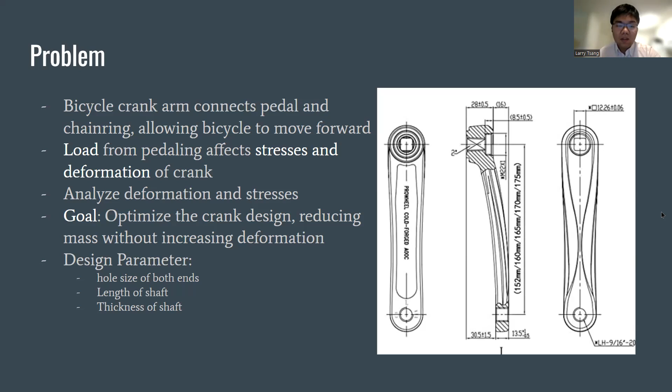And we're going to optimize the crank design, focusing on reducing the mass without increasing the deformation. And below are some design parameters that can affect the mass. For example, the hole size of both ends, the length of the crank, and the thickness of the crank. Next page.

So we start with the geometry of the crank arm. And for ANSYS, of course, we're using the static structural for doing this. And here are some basic dimensions of the crank, just like the figures we see in the previous page. The length of the crank is about 210 millimeters. The body thickness is 44 millimeters.

For the circular hole, the diameter is 15 millimeters. And finally, for the square hole, the side length for each is 12.25 millimeters. Next page.

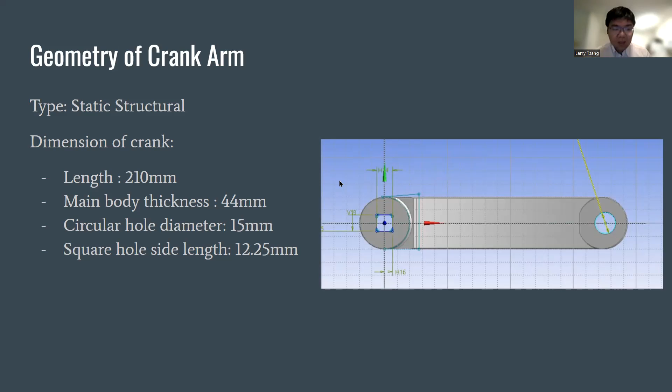Yes. After that, we extrude and make our FEA model of the crank arm. And here's the isometric view. And we chamfer most of the edges of the crank arm. And we have to mention that the material we are using is aluminum alloy, for which the density is 2,770 kilo per cubic meter, and the Young's modulus is 71 GPa.

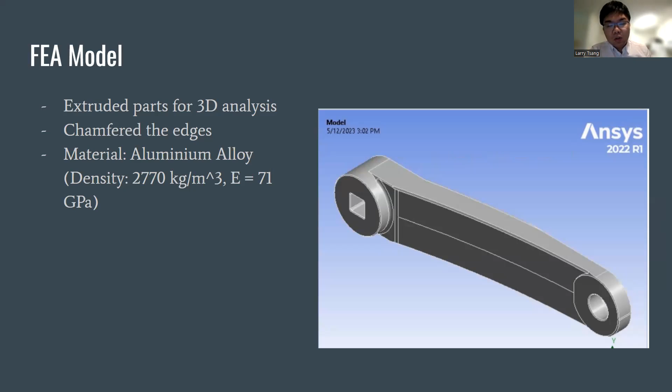Okay, so for our mesh, we used a mesh element size of 1 millimeter for the entire geometry. The smaller mesh elements were created at areas where higher stress was calculated, and to improve the mesh, we added chamfers to smooth out the edges and reduce the stress in the region.

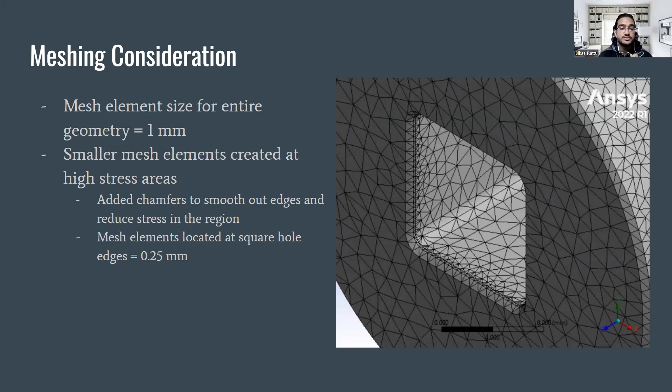And for this geometry, the smaller mesh was needed in the square hole as we found the inner edges to have the highest amount of stress, and the mesh element size used here was 0.25 millimeters. Next slide.

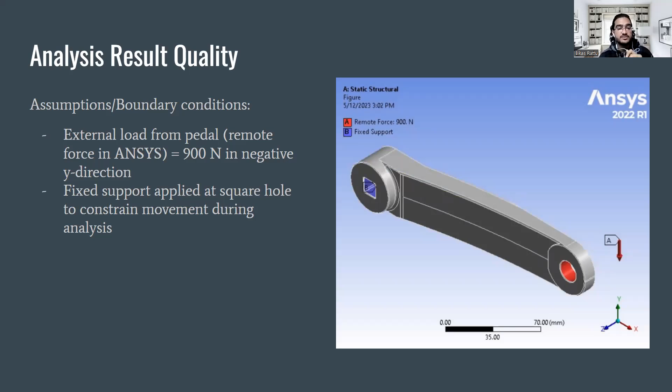For our analysis result quality, we made assumptions and created boundary conditions to help generate a realistic analysis. We applied a 900 Newton external load or a remote force in ANSYS in the negative y direction, which can be assumed from a bicycle pedal. We also applied a fixed support at the square hole to constrain movement for analysis. Next slide.

For deformation analysis, we obtained a maximum deformation of about 0.4 millimeters and an average of about 0.1 millimeters. In this case, the deformation is expected to occur when the applied external load set 4 centimeters away from the geometry results in a rotational motion due to the bicycle pedal. So we can expect a slight deformation at that end of the geometry. Next slide.

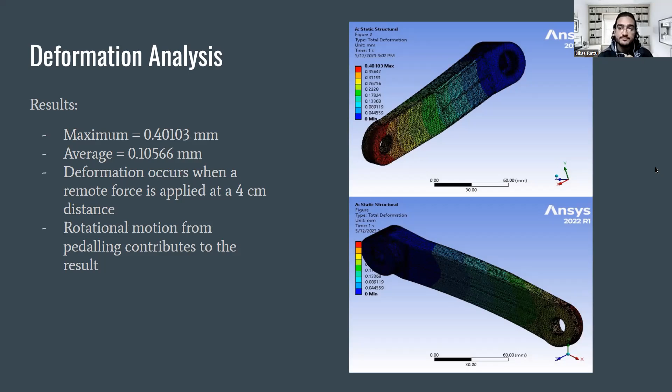For the von Mises equivalent stress, we analyzed this by solving for averaged and unaveraged cases, and it was found that the averaged maximum stress is about 357 megapascals, and minimum is about 0.18 megapascals. The unaveraged maximum was 448 megapascals, and minimum was 0.12 megapascals. And these different results proved that the analysis did not converge.

Although this is a challenge, it should not have a significant impact on the effectiveness of our analysis because theoretically the results do not converge at sharp edge geometries, regardless of how the mesh sizing is done or the smoothness of the edge. But instead, the results increase the stress magnitude to an infinite amount.

And to tackle this issue, we used chamfers to smooth out the edges of the square hole, which is the location of the max stress. And this was the best solution to reduce the stress and obtain the best results. Next slide.

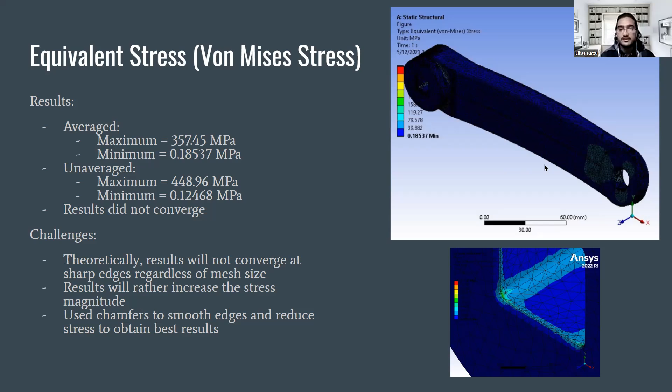And once again, the results didn't converge for the same reason mentioned in the previous slide, and the same solution was effective in solving this as well. Next slide.

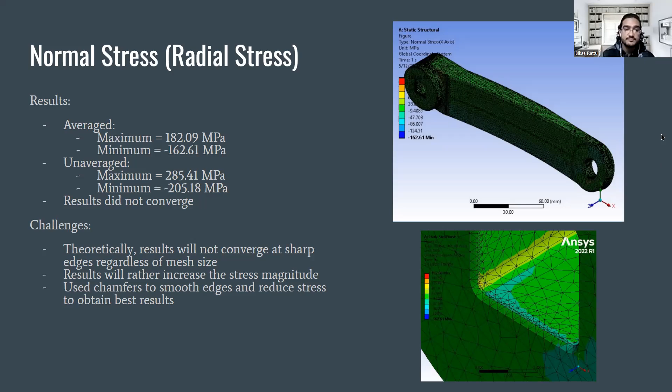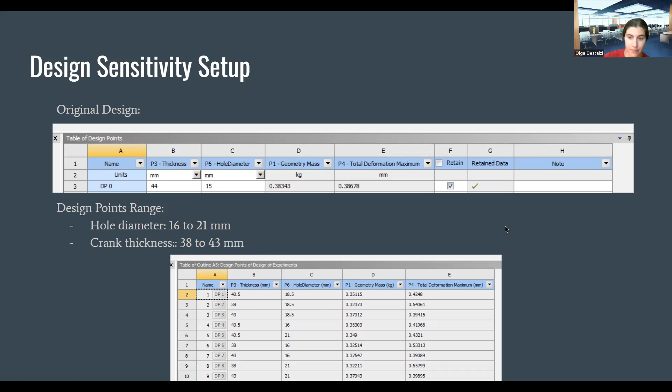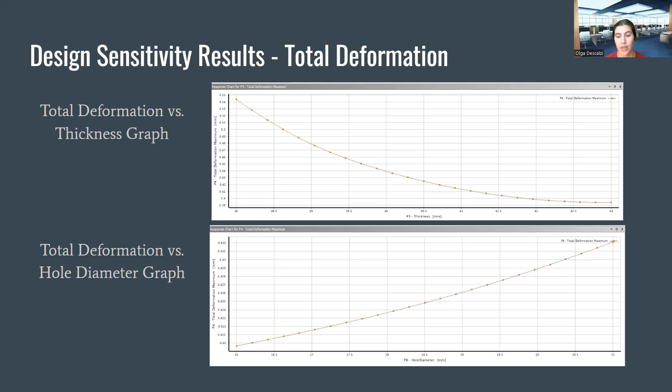In this graph, we can see the design sensitivity results for total deformation. In the top graph, we can see the total deformation versus thickness graph, and we can see the relationship that when the thickness increases, the total deformation decreases. And below, we can see the graph that shows that when the hole diameter increases, the total deformation increases as well.

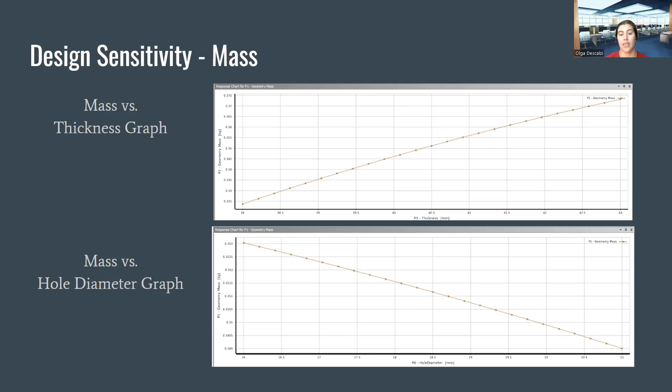For these graphs, we see the relationship between both parameters and the mass. In the top graph, we can see that when the thickness increases, the geometry mass increases as well in a linear relationship. And in the graph below, we can see that when the hole diameter is increased, the mass decreases.

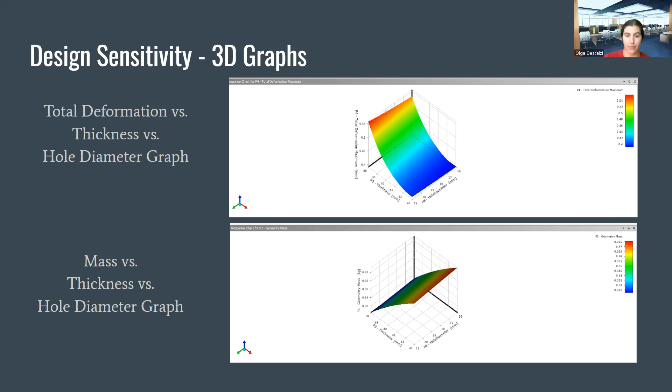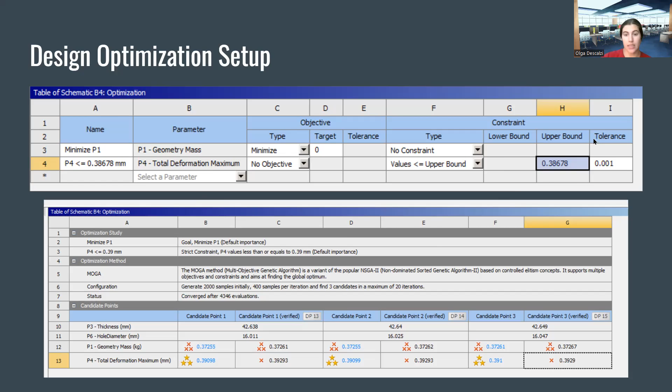In the table below, we can see the candidate points for this run, showing the 3 points for optimization. For those points, we decided to verify the design points. And after that, in this graph, we can see how they were imported to the table of design points. These are the lower 3 points. And we chose point number 15 to be our current design because it met our specifications for reducing mass without giving up total deformation.

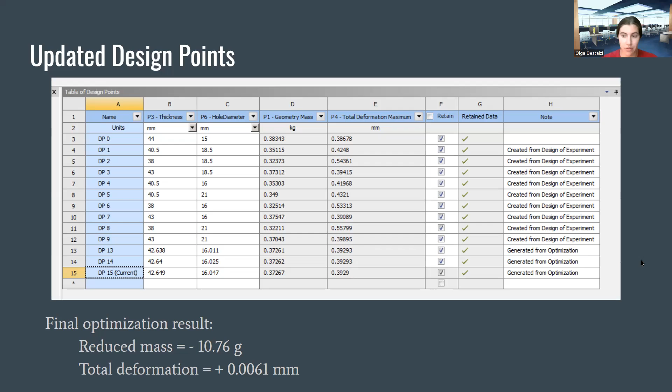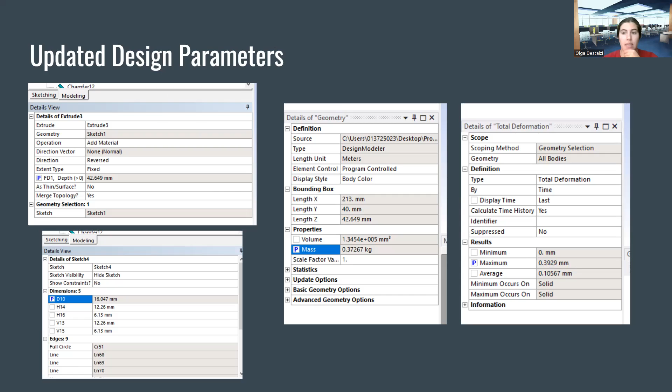And in the middle table, we can see how the mass was reduced to 0.37267 kilograms, and the total deformation on the right side only changed by 0.006 millimeters. And we proved that our optimization results were correct, and we were successful in running the mass design optimization.